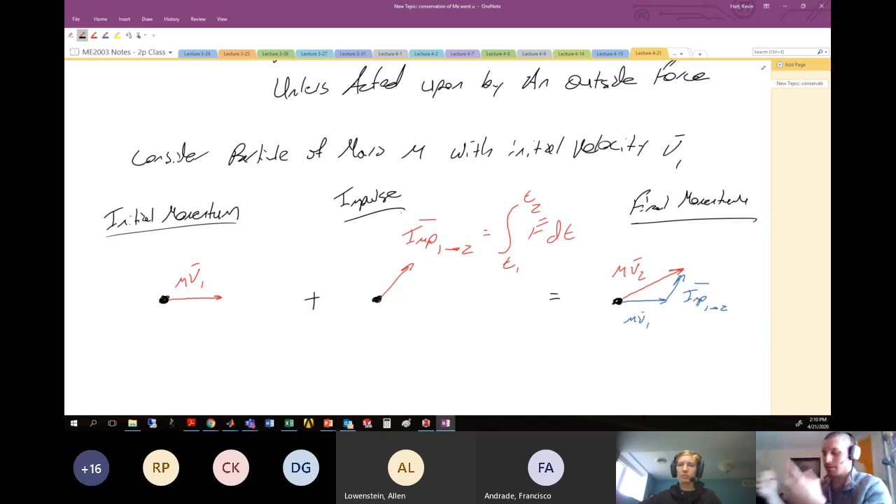We would write this, in math speak, as mv1 plus imp 1 to 2, where this should have a bar over it because it's a vector, equal to mv2, where this imp 1 to 2 is the impulse vector.

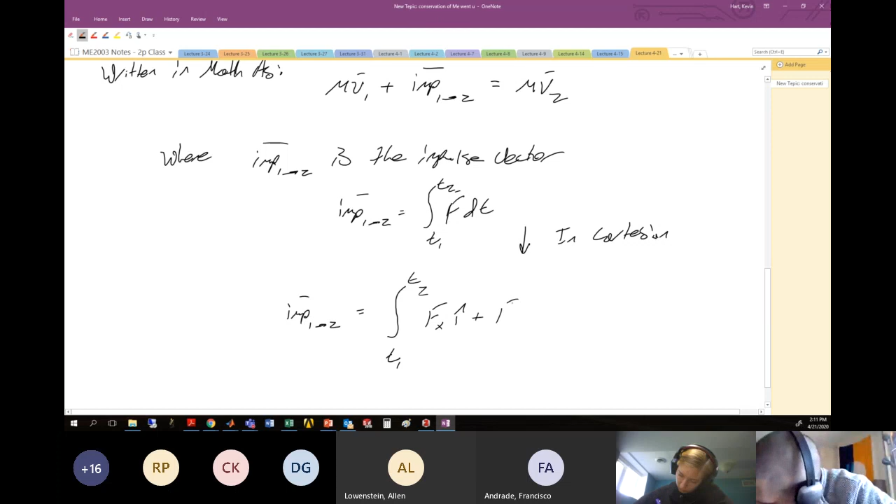All right. Here in rectangular components, you may be more comfortable writing the components, which would be the impulse from 1 to 2. Written in components would be something like still integrating from t1 to t2, but here now we have the various components, fx i hat plus fy j hat plus fz k hat, all this integrated over time.

So that's your typical Cartesian definition. I think people are a little bit more comfortable seeing it in components because people understand force broken up into components. All right. So this is all generally for a particle. This is your governing equation, or what should have been your governing equation for particle motion in 2002. Okay, so for particles.

In 2002. Were you even born in 2002? Yikes. I don't know. Some of you in diapers, probably.

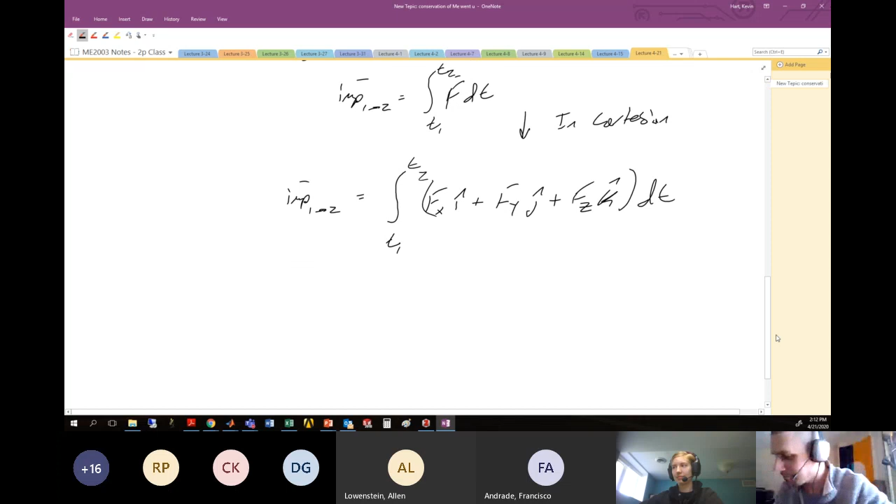All right. That's for particles. What do we do in this class? Well, we extend what we know about particles to rigid bodies. So that's what we're going to do. Which we remember, these rigid bodies are collections of particles. Now, because they have additional volume, we don't just talk about conservation of linear momentum, but we'll also have to talk about conservation of angular momentum.

So let's quickly have a recap on what is linear and angular momentum of a rigid body. So they have both linear momentum and angular momentum, and both will be conserved. And they're both conserved at the same time. Imagine that.

Now, we recall our definitions of linear momentum of a rigid body. So linear momentum given by what we saw as the capital letter L is typically what we use for linear momentum. So the linear momentum of a rigid body, and various points will have different linear momentum on a rigid body. We know this because not all points on a rigid body have the same velocity.

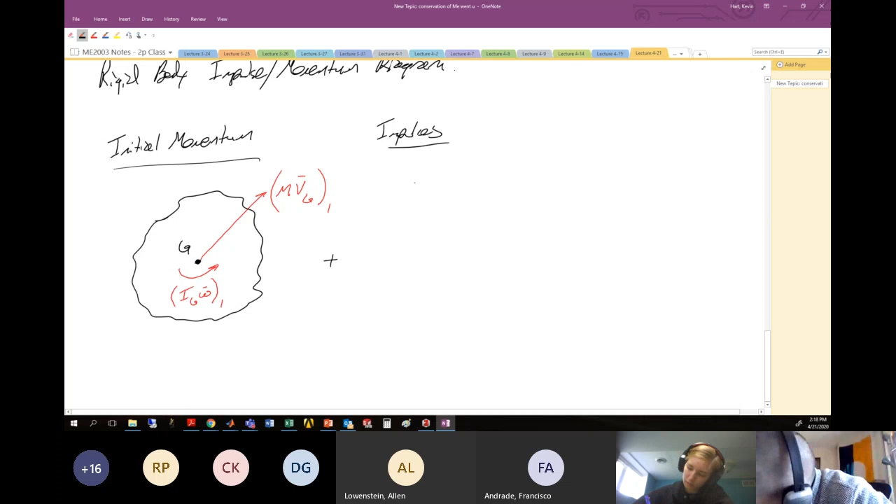All right, here's my center of gravity again. And these impulses don't necessarily have to act at the center of gravity. They can act anywhere, all right? And the impulses that you're probably most familiar with are like these force impulses. So we could have some forces that are acting over here. This is the integral of F1 dt. Here's impulse number 1. Maybe we have a force over here. So here's the integral F2 dt.

But not only could we possibly have impulsive forces, we could also have impulsive moments, right? So if I, let's say, had a torque wrench and I was torquing on the object, and I just give it one of these like rawr kind of torques to it, okay? I could also have, let's say at this location over here, some positive integral of M dt, which is occurring. All right, so this is an impulsive moment. We'll talk about those in just a second.

This is going to lead to a new linear and angular momentum in state number 2. So this will be equal to the final momentum, which is here my rigid body. And maybe now with these forces and these moments that have acted in this impulsive manner, we have a new direction for our linear momentum. So here this is m vG condition number 2. And maybe it's slowed down a little bit. So here this is IG omega position number 2, and that G should be a capital G.

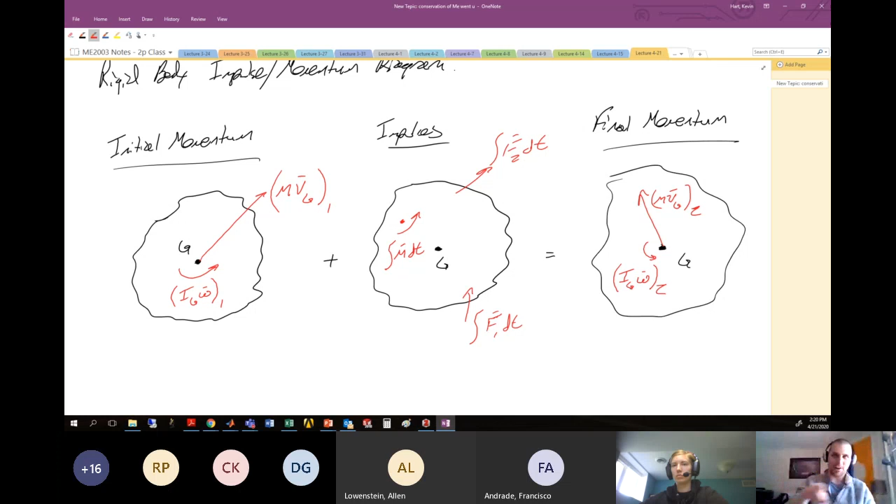Same idea. We could have some object that is spinning, and it would spin in this configuration indefinitely until something stopped its spinning. And then all of a sudden we apply some moment on it to slow it down or speed it up. So we can slow it down or speed it up by applying some moment over some amount of time, and now it's moving slower. Or if we applied a moment in the same direction it was spinning, we could spin it up. All right, so that's the general idea there.

So let's put some math down to this, since we've drawn our picture so nicely. So mathematically, just like we do for kinetics, it's easiest for us to do our analysis at the center of gravity. The equations aren't so stringent for conservation of momentum as they are for kinetics and conservation of energy, but still, in my opinion, it's easiest to keep your analysis focused on the center of gravity. So still focus analysis at center of gravity, and I'll say usually. Not as stringent a requirement, and we'll see some situations where our analysis is easier at places that are not the center of gravity a little bit later. But for now, let's just go with that.

All right. So for a rigid body with center of mass or center of gravity at G, we know that the sum of the forces about point G is equal to the mass times the acceleration at G, which we'll also define as the summation of the forces being the total reaction force at G. So here this is total reaction force. So you may see the sum of the forces written as capital R, just as one vector. This is all of the forces added up together, reconfigured at point G.

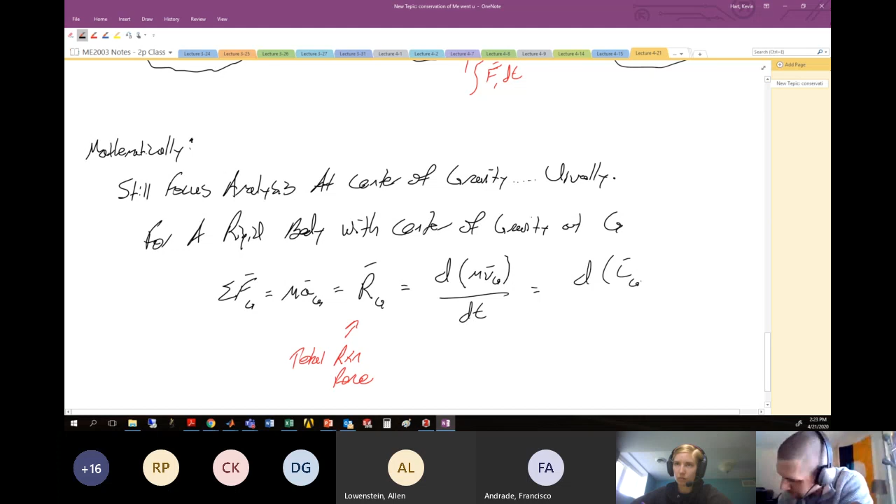And this, we know, can be written as the second form of Newton's second law, which we talked about before, the first derivative of the momentum with respect to time. All right, so another alternate definition we have. Or if we write the linear momentum using capital L as linear momentum, these are all of our forms of the sum of the forces as MA type looking equations. All right.

Here's your general Newton's second law. All these guys here is Newton's second law, which will become the basis for our conservation of momentum. So if we want to look at this guy mathematically, we can rearrange to: we have here RG is equal to d(m vG)/dt, which is dLG/dt.

The idea here is we could kind of cut this guy out and integrate with respect to time to get the following equation. Let's go through it fully. I was going to cut some corners, but let's go through it fully. So we'll integrate the left-hand side from T1 to T2 of the reaction forces that occur at the center of gravity, dt. This is equal to the integral from T1 to T2 of the change in linear momentum vector with respect to time.

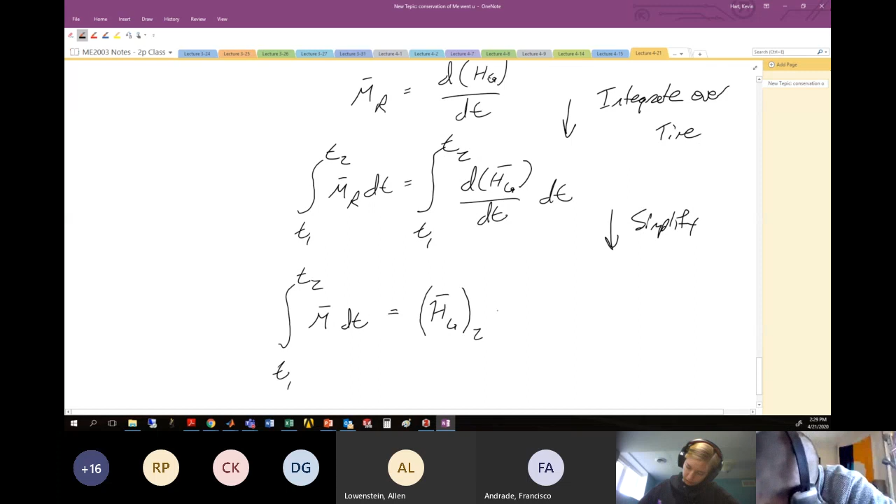And you'll have a very similar situation to what we did for the linear form. That is, from T1 to T2, the moments acting over time integrated over time. And here, first fundamental theorem of calculus, we'll have something like hG2 minus hG1. So this is the angular momentum about the center of gravity at time 2 minus the angular momentum of this object at time 1.

Again, I'll rearrange by pulling hG to the left-hand side, and you'll see the most traditional form of the conservation of angular momentum for a rigid body, which is hG in state 1 or time 1 plus the integral from T1 to T2 of the moments acting on the body at the center of gravity, dt, equal to the angular momentum of this object about the center of gravity at time 2. Here is your conservation of angular momentum for a rigid body.

All right, both of these conditions must be met. We must obey the law of physics. Rawr. Okay. So angular momentum 1 plus the moment impulses equals angular momentum 2. Pretty straightforward.

I'll say must be executed at mass center or at a fixed point of rotation. Similar to the kinetics problems, we have to do the analysis at a fixed point or at the center of gravity. There are complicated mathematical reasons why we have to do that I don't want to go into right now. Just believe me when I say I want it that way.

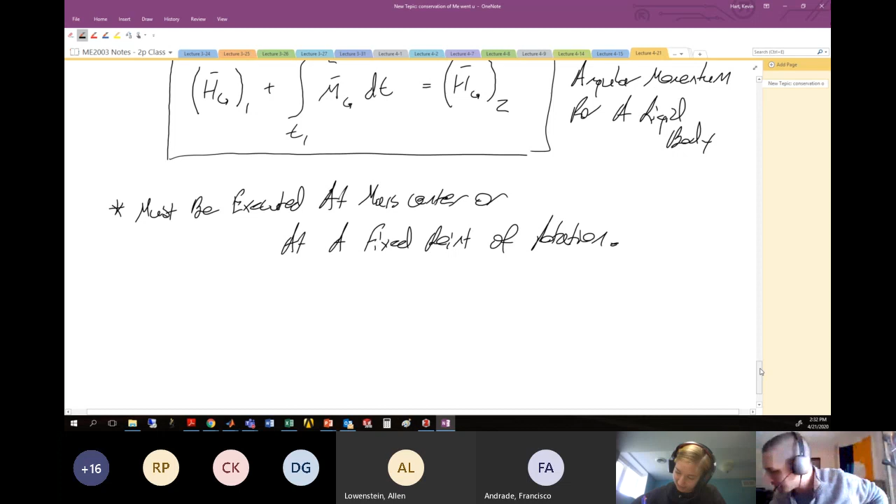All right. So must be executed at mass center or at a fixed point of rotation. Let's look at some alternate forms of that, because these are nice generic mathy forms, but let's look at some alternate forms that'll be a little bit easier to actually do analysis with. All right. Alternate forms. Let's start with the linear momentum.

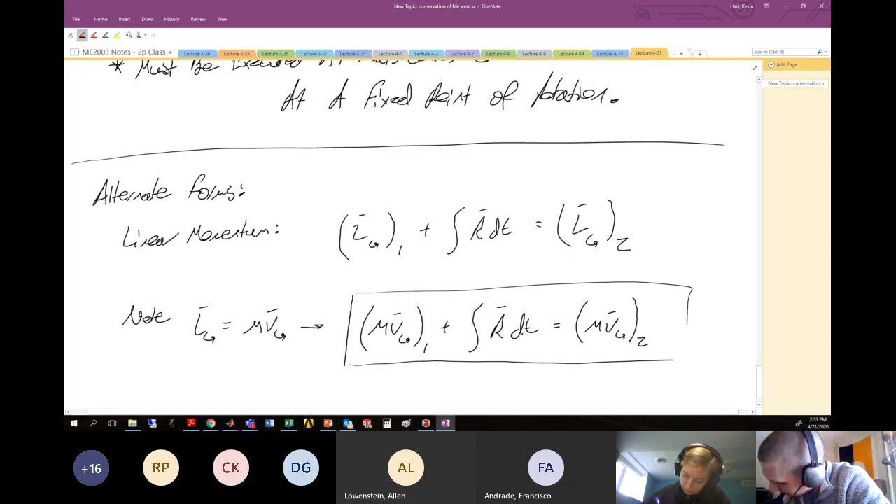Which we saw was LG1 plus integral of R dt is LG2. Well, we know LG is just mvG. So that means we could rewrite this as mvG1 plus integral of R, these are our reaction forces, dt equals mvG2. I'd say this equation here is much more common to see in practice. The theory equation is nice, but this equation here is much more common in practice.

And you know the difference between theory and practice. They're the same in theory, but not in practice. All right.

So that's mainly your only alternate form you're going to see for linear momentum. And it looks just like the form that you had for particle dynamics, except now we've focused on the center of gravity. So we see these G's here. We've focused our analysis to the center of gravity, which is an important distinction. When you're doing this for a particle, you're always at the center of gravity because there's no volume of the particle. So particle physics is the same. All right, let's look at alternate forms for angular momentum.

Okay, and we have two here that are common to use. We know the general form is hG1 plus integral of the moments that are acting, the reactive moments, equal to hG2. Now we have two alternate definitions that we've seen in the past for angular momentum, right? So recall the two definitions that we saw in the past for angular momentum.

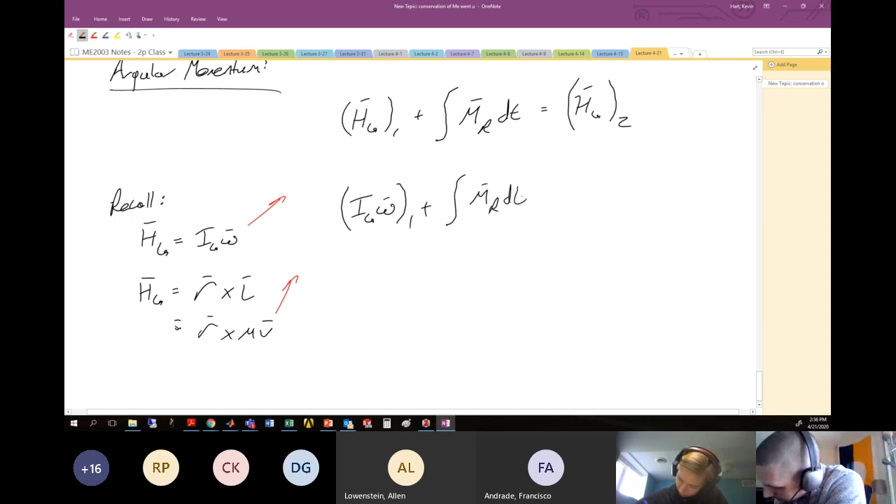Instead of hG, we'll have IG omega 1 plus integral of M_R dt equals IG omega 2. All right, so that one is used fairly often. We'll see this one quite a bit in this class. And we'll also see this other alternate form pretty often as well.

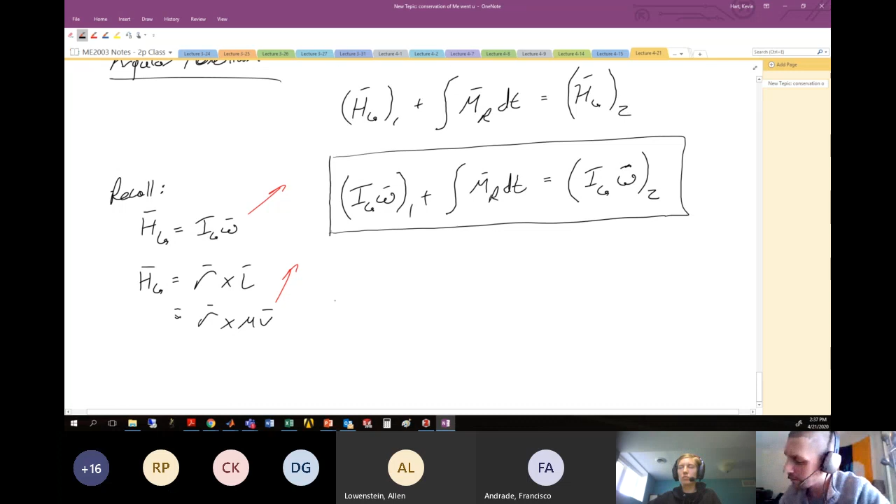That's because a lot of times we're given velocity components about particular pieces, and so doing this cross product r cross mv is sometimes a little easier for us to work with. So the other possible alternative that you might see is position vector crossed with mv1 plus integral of, you might see it as r cross F. This, remember, is a moment.

dt equal to, what is R cross mv situation 2. So these are your other two sort of alternate forms of the angular conservation of momentum equation for rigid bodies.

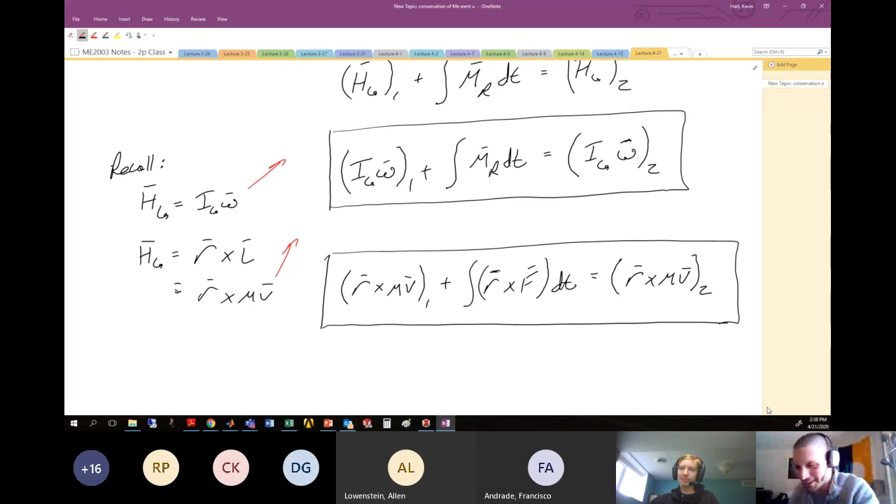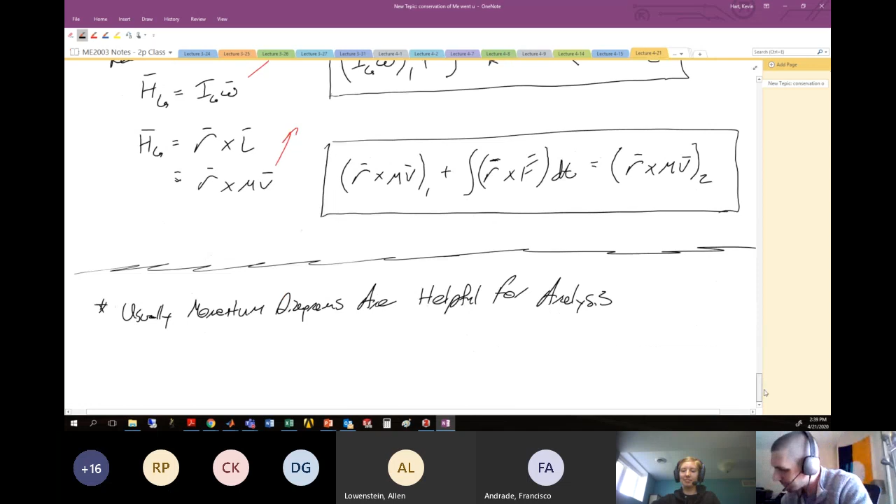So if I go back up to, wow, way up there, this guy. This is your momentum diagram. Initial momentum, impulses, final momentum. We will be doing a lot of this. Don't worry. Don't you worry your little keister. We'll be doing a lot of those guys. All right. So see the notes if you want some additional examples for how to do this.

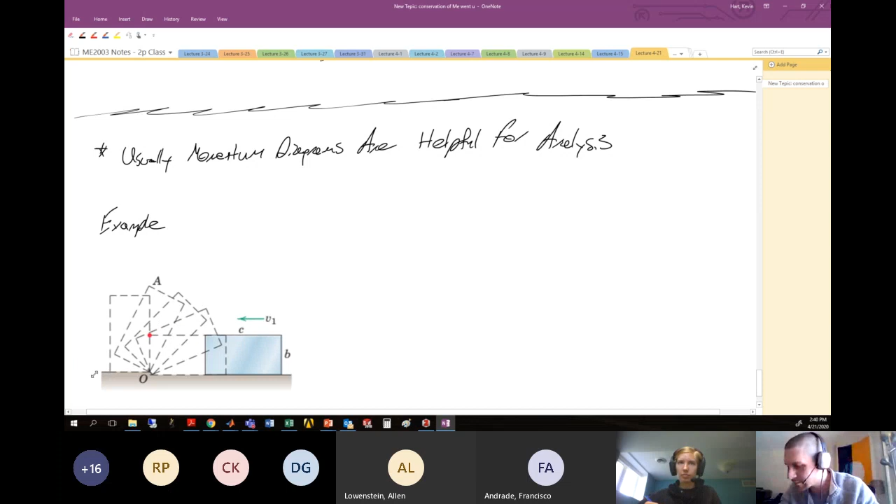All right. Do I have time to do this? Yes. All right. So let's do a practice momentum diagram example. I will bring a picture in here and we will execute the momentum diagram. All right. Here's our setup. We've got a block sliding along and it's got velocity v1. It hits this pin here at O, or this sort of lip in the ground, causing it to pivot into an upright configuration.

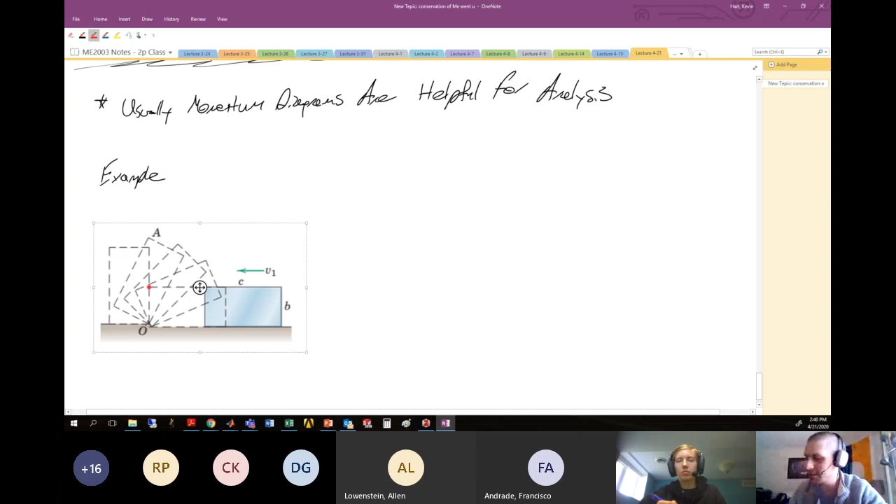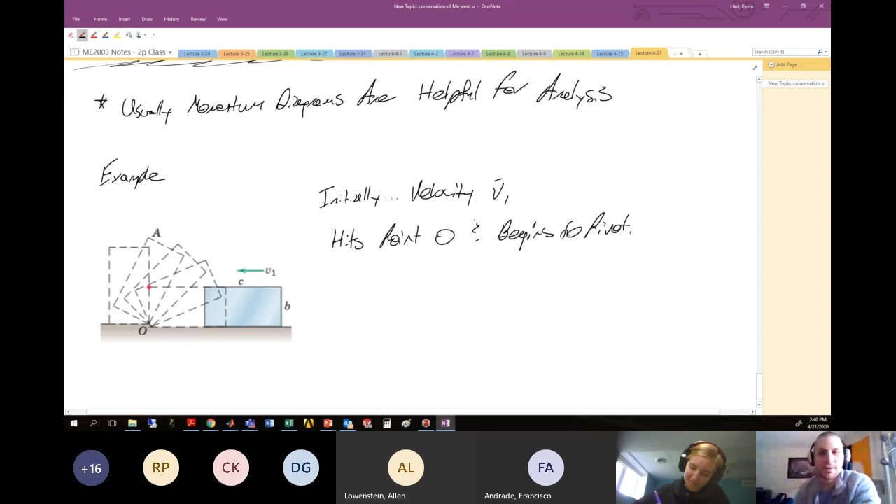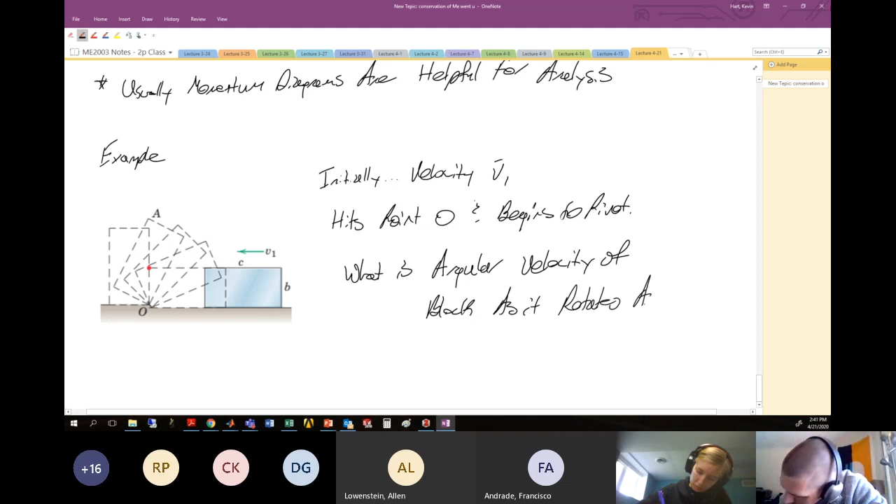All right. First thing we want to do is create a momentum diagram for the situation. It'll help us with our analysis. So let's do that, and we'll include both linear and angular components to help us on our way. So hopefully we understand the problem here. This guy is sliding along this general direction, minding his own business, when all of a sudden he slams into this point down here at O. That's going to cause this guy to prop into this upright configuration.

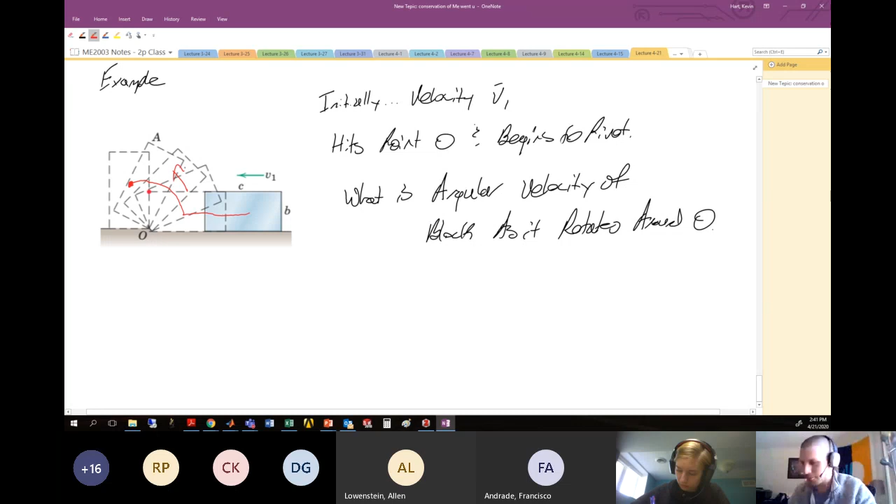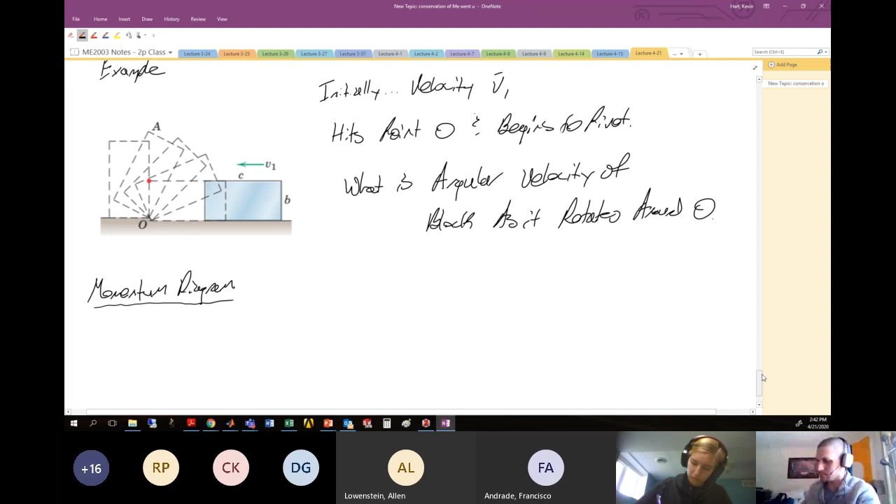So I want to know during this motion, what is the angular velocity being incurred by this block? So that's the analysis that we're doing at this particular point. So let's do our momentum diagram. All right. Got to scroll this down a little bit. Hopefully you got the problem statement down. I'm gonna move on with my life here. If not, it's in the notes.

Initial momentum. We need an initial momentum. We need an impulse. And we need a final momentum. All right. The initial momentum is easy. This block is sliding along the ground with a certain velocity. So here's my initial momentum of this block. Center of gravity, G. It's moving to the left. It's got a mass, it's got a velocity, situation number 1.

I'm done. There's no rotational motion of this guy, so I don't have any angular momentum of this piece at this particular moment. The linear momentum is just mv1. All right. Impulse. Here's where things start to get a little bit tricky. The impulse is now, I will have this block running into point O. The way that we're going to deal with this is we're going to treat point O as a pin.

So treat O as a pin. If we're treating it as a pin, that means it can provide force on this block in 2 directions, right? So in the Y direction and in the X direction. Obviously, it's going to be pretty easy to see that it's going to provide some resistance in this X direction. So here, let's draw that.

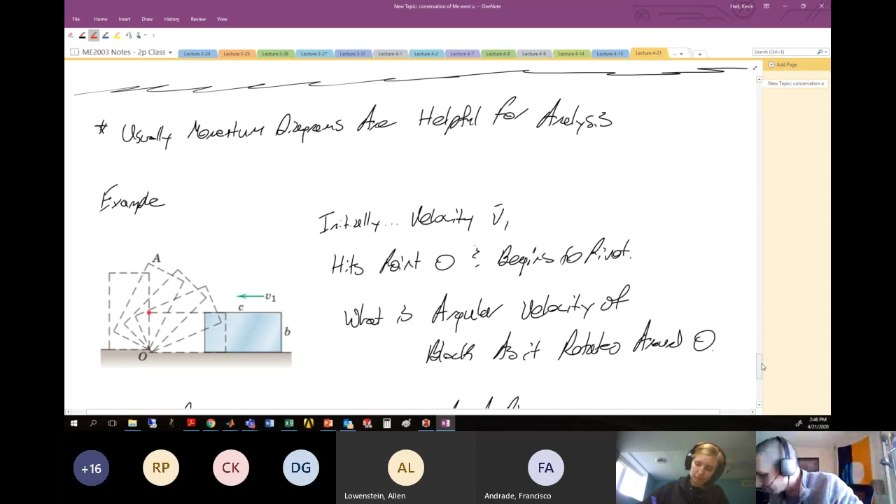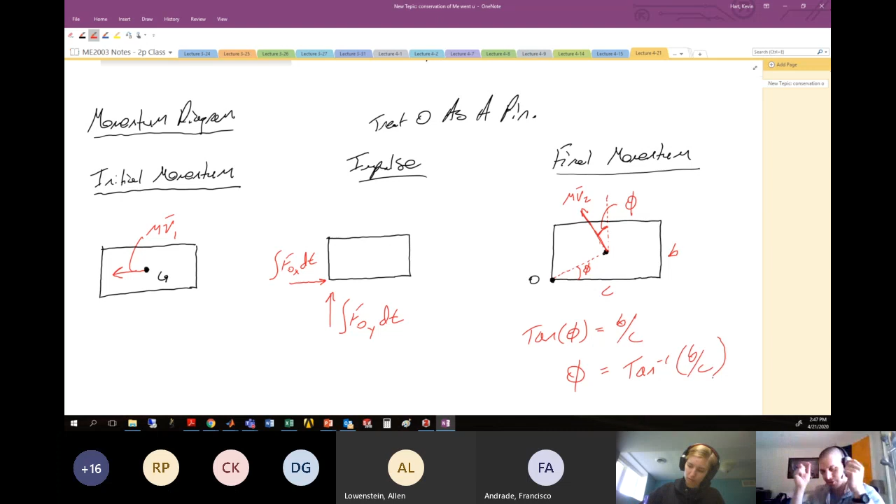Let's define our geometry in our box. So go back up here. We have short side length B, long side length C. That means that this angle phi is the same as this angle here, phi. This short side is the length B. This long side is the length C. So I can define the angle using the inverse tangent. Note here that tangent of phi is simply B over C. So if I want phi, that's the inverse tangent of this thing. That will help me define the orientation of the velocity in this problem, just based on the geometry of the box.

Last thing we'll do is define our last angular momentum component, and that is we're now going to have some rotation of this guy around point O. We've got some angular velocity now. So we have to define this IG omega. And if we want to be complete, since we're doing a momentum diagram, this is in state number 2. So there's your IG omega in condition 2. And understand that this is in the K direction. So this is your full momentum diagram for this particular problem.

All right, that's going to be it for now. We'll call it here. And we'll pick up this example tomorrow to finish out solving for that angular velocity in state number 2.